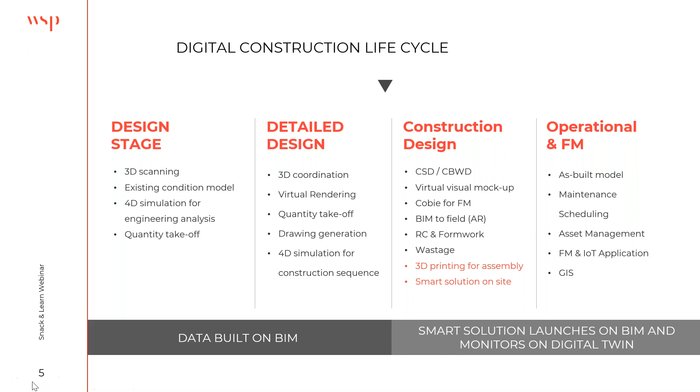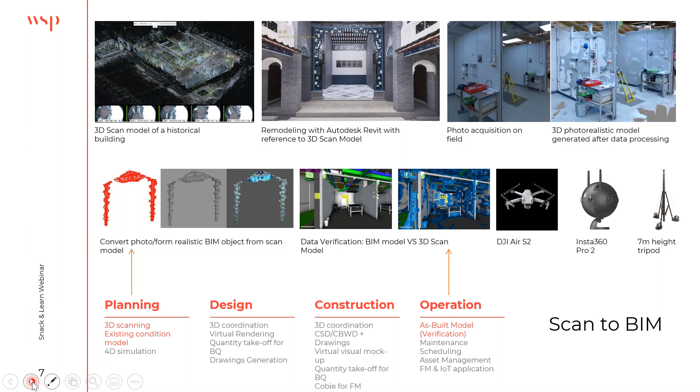So what is our experience in BIM applications? Let me share with you. Our Hong Kong office has developed a lot of BIM experience in projects. First of all, as said, we do scan to BIM. Why do we need to do so? Because during the planning stage, we need 3D existing conditions modeling. And by doing scan to BIM, in the operation stage we have an as-built model for verification of our design. Here are some projects we have participated in using scan to BIM.

Everyone knows that BIM has 3D, 4D, and 5D. 3D coordination definitely helps in the design stage. 4D time construction can be done in the planning stage as well as the construction stage. This is particularly important because it lets the project team handle material delivery and resource planning. And quantity take-off for 5D is also very important, and it will ease a lot of effort from the QS.

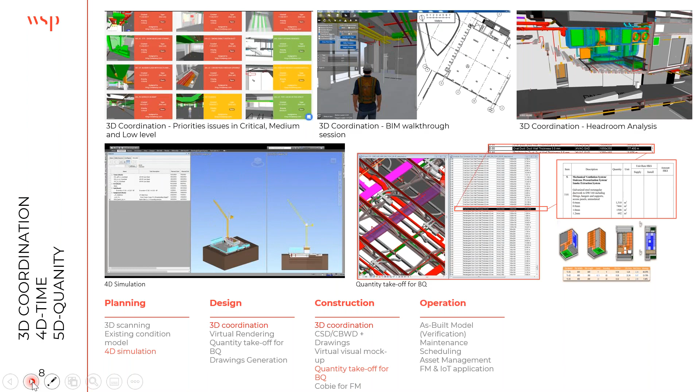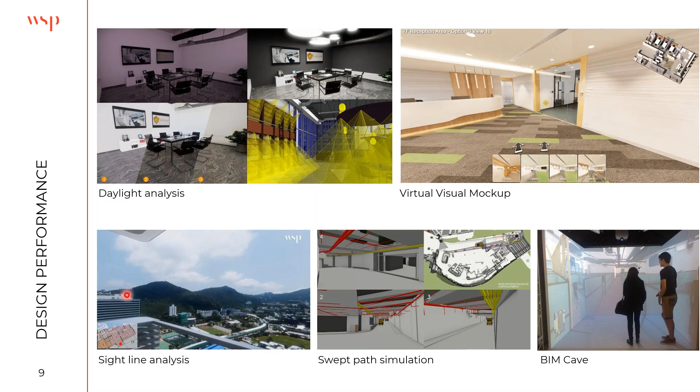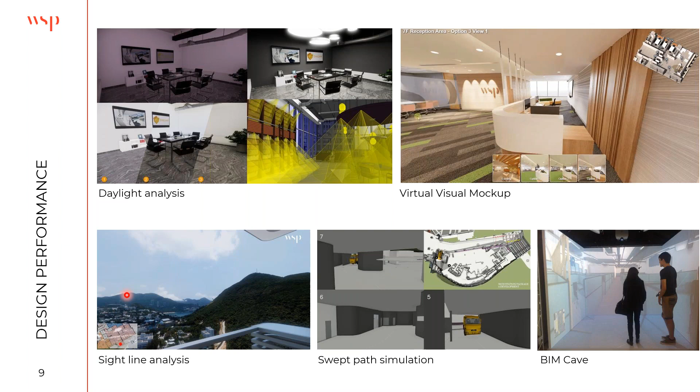Beyond those functions, we can also have design performance. Once we complete the BIM model, we can do a lot of design performance virtually, like daylight analysis, virtual visual mockup, and sightline analysis, as well as swept path simulation, which is very critical and precise. Apart from the virtual ones, we can do physical inspection, because based on our BIM model we can do our BIM CAVE so that we can experience what we design and what it will be.

But after this development of BIM, we have indeed faced quite a lot of challenges, and this is a chance for us to share with you. Mainly there are four stakeholders where we think there is still room for improvement. We need the general public to have more knowledge about what BIM is. During implementation, the project budget has to allow for the designer to do the works. The engineer designing the BIM model has to be very familiar with it rather than using the traditional design approach. Lastly, the stakeholder is the contractor, because they build the work, but we need the BIM model to be part of the contract.

There is also a transition from traditional project planning to BIM project planning. It is very difficult sometimes to convince professionals to do BIM because they don't believe that BIM is more efficient for the implementation process, and they think it is a challenge. But we have to demonstrate that by using BIM project planning, it will be more efficient and the overall project can gain benefit. How do we do it? We can do well preparation of the workflow by adopting a good BIM execution plan.

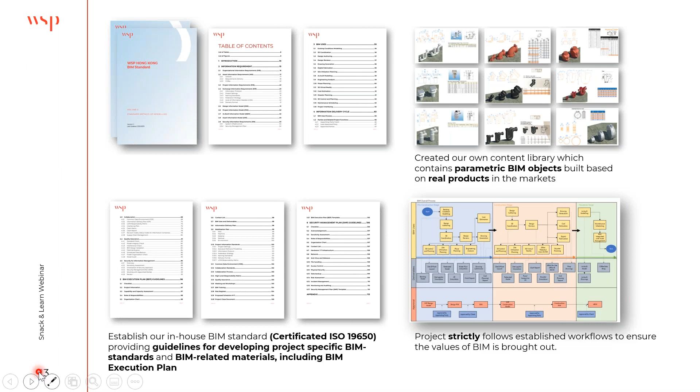Here are some examples. We have built up a lot of in-house BIM standards, which already have ISO 19650 certification, which provides guidelines for developing project-specific BIM standards and related material. We have also built up a very strong content library for parametric BIM objects, based on real products. Why do we need real products? Because once we plug in those objects, it becomes a 5D model as well, which facilitates time for construction.

This is one of the challenges around the BIM forum. It's about how we talk too little about what we should stop doing. What does that mean? BIM is constantly evolving and being added to, and BIM is already being executed in many construction projects. But people around still think the old way, which is the document-centric world, guided and bounded by statutory submission.

Although some people think digitalization is just a simple way of electrifying paper, this is not the case. It must revolve around a model and data-centric approach throughout the entire BIM implementation process. This is the real BIM, and it will facilitate the project.

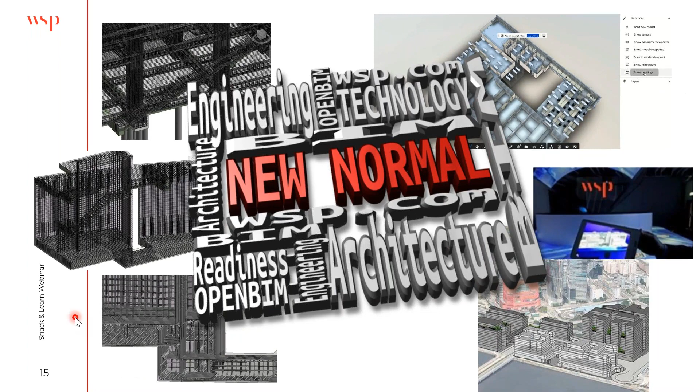This comes to my recommendation, because we need some new normal concepts. By using BIM, we can generate a lot of thinking - we can do rebar fixing, digital twins, augmented reality using BIM to do a lot of things. We have to bring ourselves into a new era to develop our technology, not only about architecture, but also about engineering.

So we also want to introduce you to another concept about Open BIM, which is presented by Cecilia. So Cecilia, please. Thank you, Clifford.

Another challenge of BIM in Hong Kong is related to interoperability across different software. We need BIM data to be open, live, and available for all project stages. BIM data doesn't belong in proprietary format. Open data becomes particularly important for the development of digital twins, where all kinds of data shall be able to be collected or shared without too much barrier. In the construction industry, each project team is established across different organizations and disciplines. They will have different tools to share information with each other, and the data generated in the initial design stage needs to be usable without re-entry for the next stage. You cannot have a true open BIM workflow without interoperable software. Interoperability is about freedom to work with the best tools in any discipline, and for teams to use the tools they are most comfortable and productive with. This is the foundation for Open BIM.

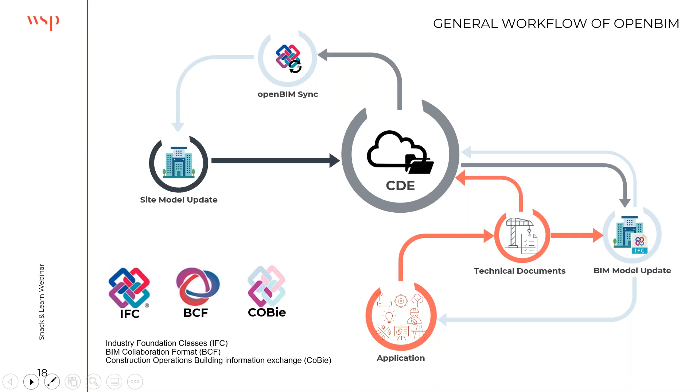If you share it in native file format, anyone can make changes easily in the original model. But if the model is shared in OpenBIM format, then the data is viewable, measurable, and usable. The model content is therefore protected, and the original file cannot be altered by any other member.

So OpenBIM supports transparent and open workflow. It also allows all project members to participate regardless of the software tools they use. This is the same case for the contractor during the construction stage.

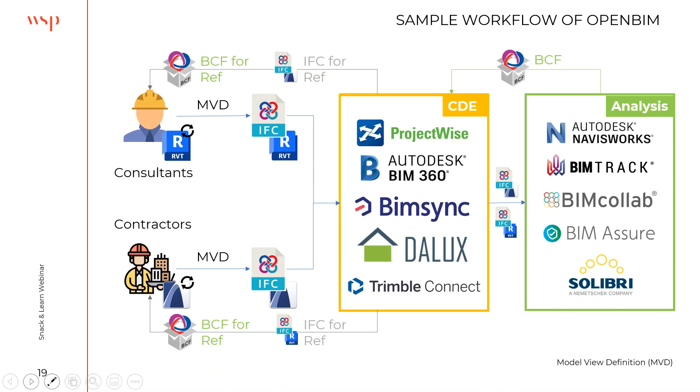I know it sounds complicated, so let's make it simple. We write a document and share it with somebody. We usually do it in PDF format, which allows us to see the document, add comments and suggestions, but the original text cannot be changed. However, it's not the same when you share the document in Word format - the original text can be changed easily. This is the same concept for BIM.

Whether IFC, BCF, etc., it will need to satisfy at least one or many exchange requirements of the industry. The method used and propagated by buildingSMART is the Information Delivery Manual, IDM, also known as ISO 29481. Others, such as file formats for storing data or exchanging 3D and 2D data, will need to refer to different ISO standards.

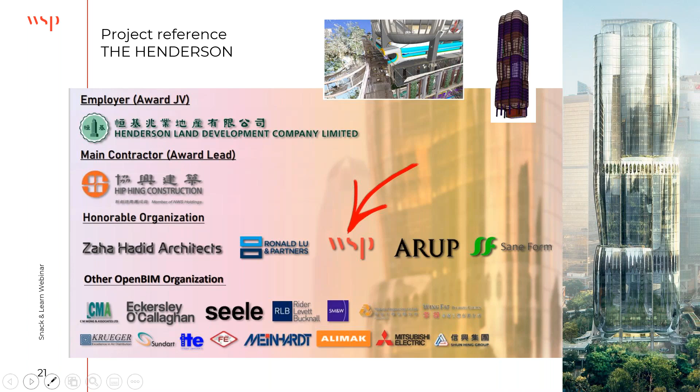I'm going to share with you one of our project references, called the Henderson. It will be the new landmark building in Hong Kong in 2023. WSP Asia is the MEP consultant for this project. It features sculptural, cutting-edge curved glass design, which is the first to adopt in Hong Kong. It has implemented OpenBIM best practices from design to construction stages.

In this project, we have used more than 15 software among the project team. The Henderson facade is very special - the biaxial curved insulating glass panel is very challenging for its production. Therefore, the exchange of data between individual trades is very important to enhance successful coordination towards fabrication.

Here, the BIM manager has coordinated with different parties at the beginning to align the suitable types of software to be used in different project stages and the way it is to be exchanged.

The facade engineer is adopting both CATIA and Rhinoceros for the facade design, and then the BIM modeler references the design model to further enhance the 3D model using different BIM software. This model will be shared with designated parties on Trimble Connect and further analyzed using Navisworks.

All of them are to be shared in IFC format, and all issues are to be recorded on BIM Track in BCF format. If design changes are required, it can generate BCF or IFC data back to the originating software, which is later used in the design software for review.

Some of this software needs to rely on external plugins or APIs developed by in-house programmers to generate an OpenBIM format so it can further communicate between parties.

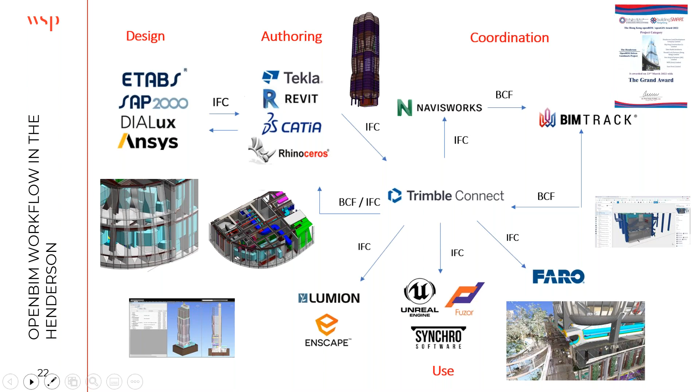So for the pros and cons, certainly it has more pros than cons by adopting the OpenBIM approach. First, every project member is able to use the best tools for their particular workflow without being locked into each other. Secondly, any stakeholder can access the BIM model without interfering with the native design model.

All the systems used on a BIM project can communicate with each other, which reduces the chances of compatibility errors and the time project members spend dealing with interoperability problems that may result in going back to a traditional workflow and slower collaboration.

With OpenBIM, the worst case scenario is that due to technology limitations, some software, or even no existing tools, can read your data. So you will need add-ins to further facilitate the process between them.

It's advised to have your in-house BIM programmer ready to deploy some application programming interface, that is API, to enhance the data exchange smoothly. And in addition, when there are too many different types of software, it may be tactical to generate a lot of IFC files and properly manage them.

And finally, of course, you will need an experienced BIM manager who can decide what to use at different stages. So let's hope that one day, when both BIM and OpenBIM get more popular and steady, everything will be as easy as generating a PDF.